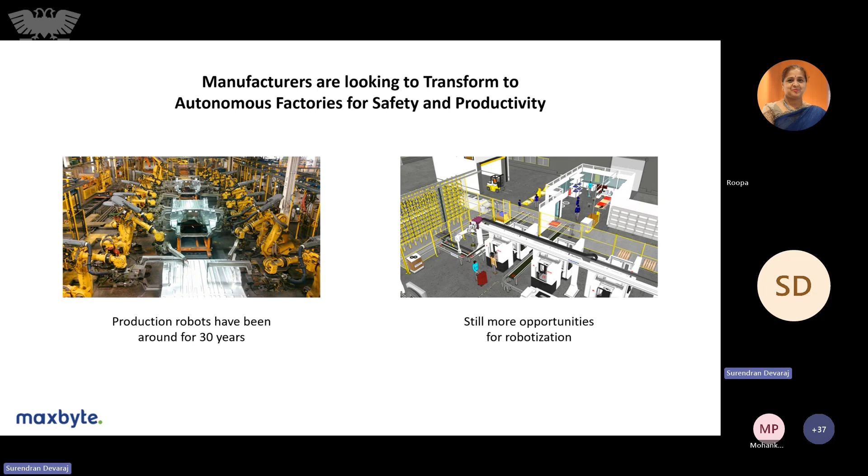So that they can have a complete 360-degree feedback of their shop floor, their production unit, the packaging unit, or the logistics - whatever is required for complete end-to-end production operations on a day-to-day basis. As a company, we are also working on multiple opportunities and areas where this can be strongly integrated with their digital roadmap for any industries.

So manufacturers still see a lot of areas where they can transform their way into autonomous factories. Like digital factory, manufacturers are now keen towards the next wave of technological transformation. They call it a lighthouse factory or dark factory, where they want to run the factory 24/7, even without any human intervention. That is the aim, or the next vision, for all manufacturers with which they want to move their organization or their shop floor.

As the first part of it is the digital, where all our machines connectivity has been made, all our data has been continuously monitored, and insights has been derived from that data. And the next step of that particular digital transformation is how this automation also can be a part of it, like loading and unloading of the machines, like transportation of the goods within the factory and outside the factory, both intra-logistics and inter-logistics.

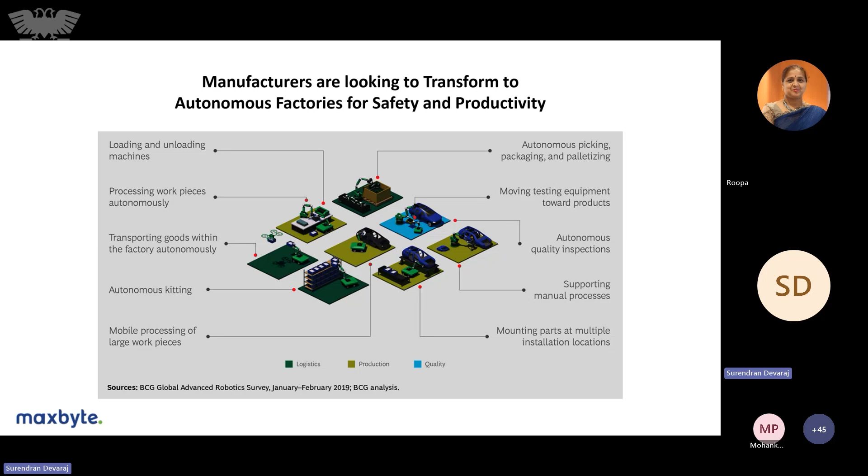And then processing of the work pieces, autonomous picking and packing, in the quality inspection, autonomous quality inspections. So and the installations and so on in the various areas in terms of logistics, production, and quality. So how these automation can be an integral part is something the manufacturers started looking into.

Globally, so similarly, there are a lot of opportunities that has been identified. Either it can be in terms of sorting or pick and place or tugging or warehouse, for other production or material movements also. There are a lot of application areas that has been primarily identified by the manufacturers, so that this AMRs or autonomous mobile robots or autonomous vehicles can be deployed.

So what are the key drivers for this AMR is something also very, very crucial. So based on what we can able to select this particular AMR. So maybe based on the speed, there should not be any latency whenever the material is required on the assembly line or in the production line. It should be readily available without any notification.

There should not be any dependence on manual dependency for the material movements, as well as on the labor dependencies, and also on the modernization, as well as on the cost. How can we able to reduce the cost, as well as the safety is one of the critical aspects that has been brought into picture. So how safely we can able to move the material from one place to another place, how quickly we can able to move it, and how this can be integrated with our day-to-day production scheduling or production activity, these are some of the key drivers for this AMR.

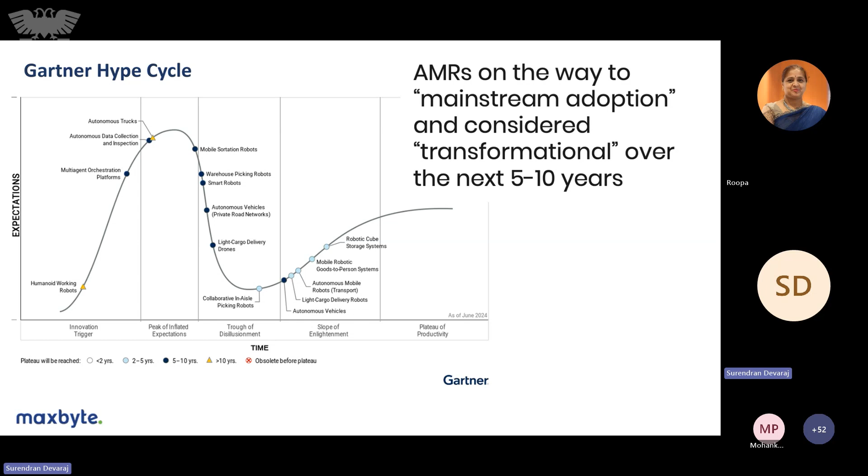And then they can start using, or they can start implementing it in their day-to-day process as well. So this is something which has been released by Gartner over the past few years, and similarly for each and every area - for digital there is a separate hype cycle, for automation, autonomous AMRs there's a separate hype cycle. Similarly for all the technologies, they're releasing this hype cycle where we can find what are the next wave or next gen solutions that can be used in our shop floor, in our manufacturing industry, so that we can completely adapt to this particular technological growth.

So this is like, as I said, the dark factory or the lighthouse factory is like a factory of the future, where we can automate the complete operation of the factory with the help of robots, AMRs, and digital solutions, so that the complete operations will take place autonomously without any manual intervention.

All movements, material movements inside the factories, inspections inside the factories, and data gathering during the assembly or production process will be completely automated and digitized, so that we can take quick decisions on the data we get, and see how these robots, cobots, or AMRs react to particular situations on the shop floor—something manufacturers have started looking into.

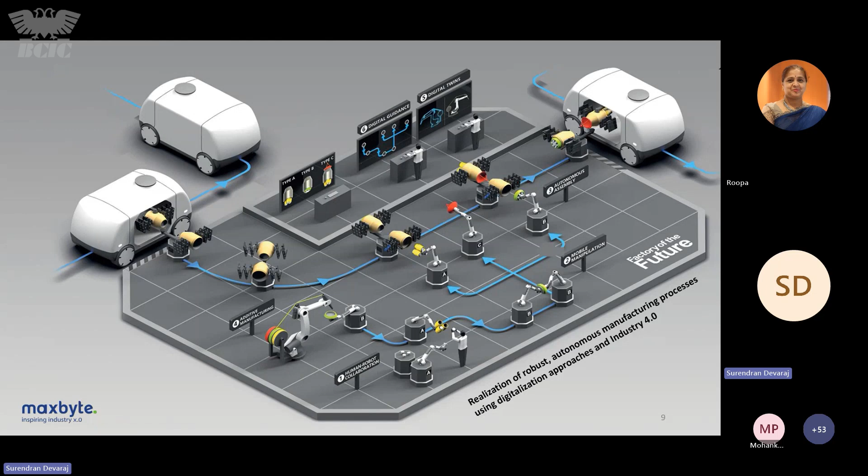This is the future of the factory that we are visualizing—digital maturity autonomous levels. For any digital maturity, there are around 6 levels: computerization, connectivity, visibility, transparency, predictability, and autonomous adaptability. These are the 6 levels we think of in terms of digital maturity.

Similarly, for any factory to transform autonomously, there are again 6 maturity levels: manual, semi-automated, automated, semi-autonomous, autonomous orchestration, and autonomous operations. We can find out which level we are currently in, and what solutions we can deploy to move to the next level and reach the highest maturity for autonomous industries.

There are multiple maturity models available, so we can use whichever suits our particular process and factory.

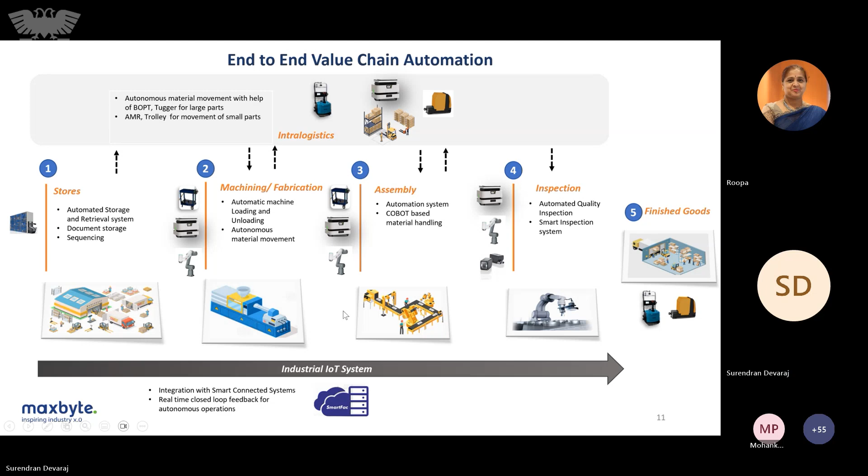There are multiple factors that determine the levels of autonomy for autonomous mobile robots: whether you want only a navigation system to help navigate from one place to another, or material handling where materials can be autonomously moved, and how this can be integrated with other facilities in the system—the ability of machines to communicate with machines without any manual intervention so the complete process can be automated.

These are the various levels we can decide on for our operations, based on what autonomy level we require—whether to go for robot or cobot automation, then AMRs, and then autonomous vehicles for complete automation of the system.

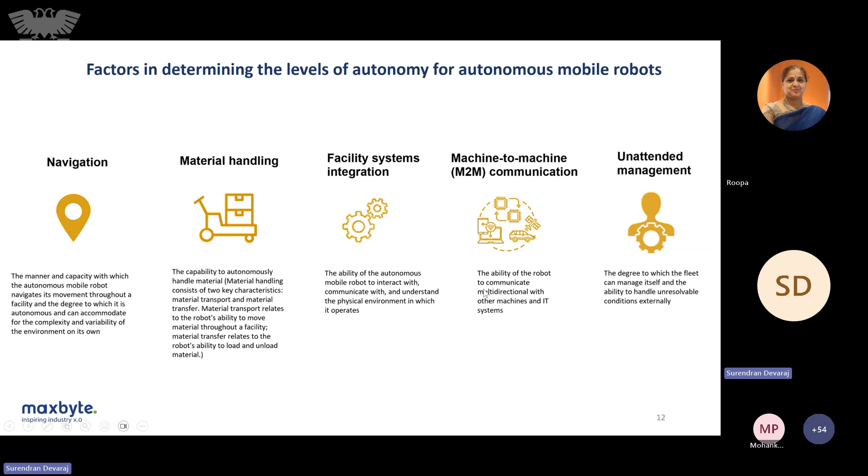To what application we can use, or what kind of automation solution, there are mobile platforms available for industrial application. If we go for a mobile platform, we can go for either navigation type or manipulator type. Manipulator primarily deals with industrial robots and cobots and other areas, so we directly call it industrial mobile robot that can be integrated with our system.

If you go for navigation type, then there comes the AMRs and AGVs. AGV is nothing but an automated guided vehicle, where the vehicle will be moving in the shop floor based on some guidance - either a QR code on the floor or a magnetic strip on the floor. Based on that particular guidance, the vehicle will be moving in a straight line along that particular line itself, which has been laid through the factory. That is called the guided path vehicle or automatic guided vehicle.

The other side is autonomous mobile robots, where there won't be any guidance available for the vehicle to move in. It will be completely based on either lidar or some other autonomous technology mounted on the particular vehicle. It will automatically try to map the complete shop floor, automatically find the shortest route available or the best path available, and then start navigating on its own. That's the key difference between autonomous mobile robots and automated guided vehicles.

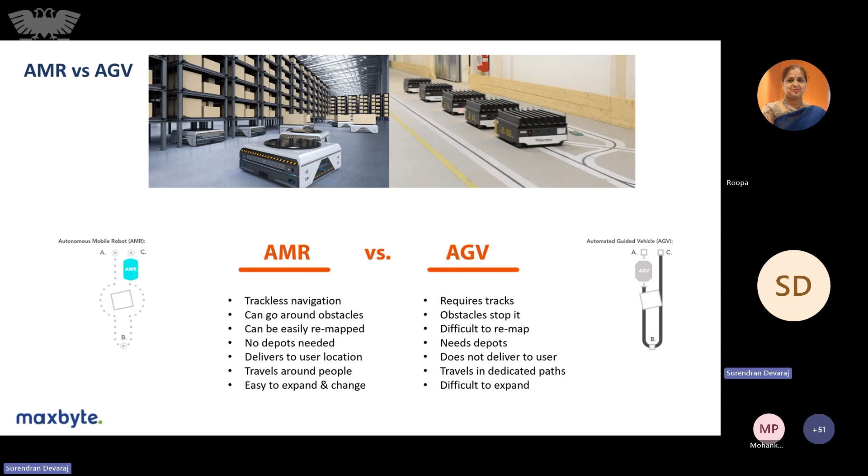Various process areas, like it can be warehouse. AMRs can be configured in warehouse. Maybe the next state can be reconfigured in the assembly area, or the next state can be reconfigured in the packaging area, and it can be used for various purposes as well. So this is the advantage that AMR brings over the conventional AGVs used in industries.

Based upon the form factors, there are multiple forms that AMRs can be available, and also based on the loads being carried, the AMRs can be in different forms. For example, the truck is one form of AMR where it can pull the load. It is kind of for heavy load, like more than 1 ton or 2 ton.

If there's a load, we go for this truck. Or if it is like 50 kg to 600-700 kgs of weight, then we can go for a mouse type AMR where we have a platform that can lift the material or tug that material. So forklift is another kind of AMR where it can be used to lift loads and relocate loads from one place to another.

So based upon the application, based upon the loads, and also based upon the driveway capacity and usage, the AMRs can be in different forms. And the existing vehicles also can be converted to AMRs. For example, our existing BOPTs, battery operated pallet truck vehicles, can be converted into an AMR.

Legacy cleaning machines can be converted to AMR so that it can operate without any manual intervention. Likewise, any vehicles can be converted into autonomous vehicles, and AMR as a separate platform is also available. So as I said, there are two variations to these AMRs.

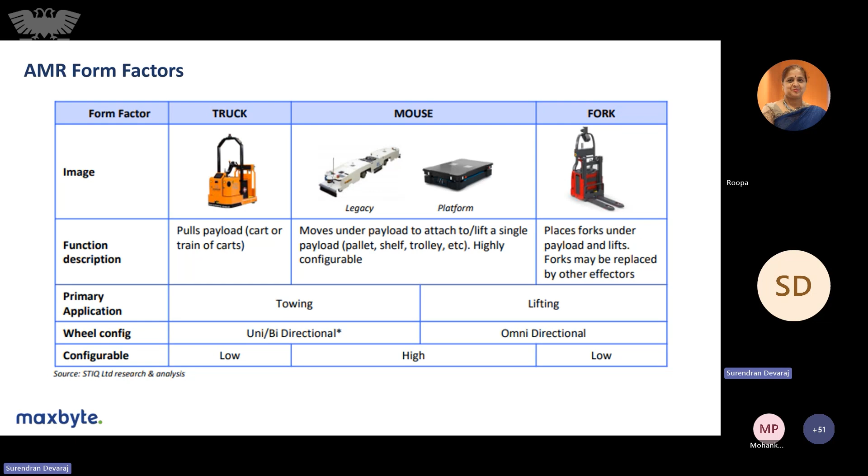Either it can be a platform-based approach where if you see a picture, there will be a base platform, and on top of it can be used for multiple applications. Whereas the other is where vehicles can be converted to AMRs like forklift, stackers, tuggers, or BOPTs, and that can be used to pull the loads or move the loads from one place to another. So these are the primary variations or primary applications of this AMR.

And these are again some examples, like in healthcare, how it is helping the people, or how it helps in the movement of goods - not only material, even administrative materials like office files or patient history files or meals, clothes. So that can be used for the movement of these particular items, any kind of movement that can be automated or made autonomous using this AMR.

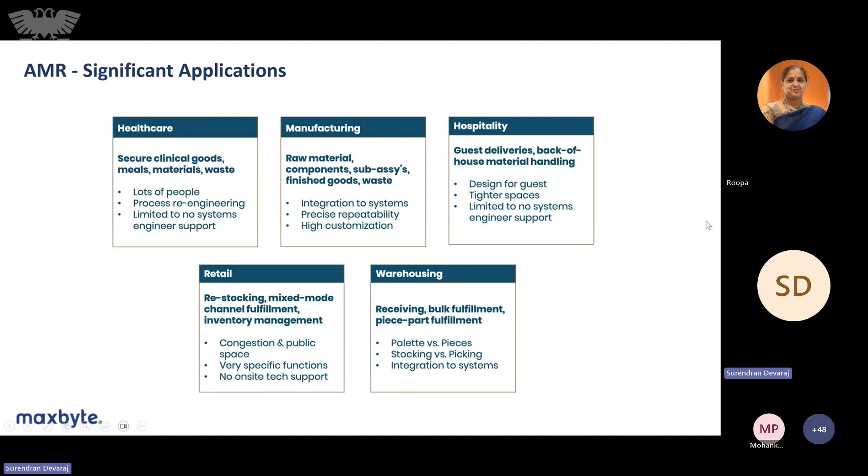In manufacturing, primarily used for raw material movement or finished goods movement or quality inspection. In hospitality, where it can serve the guests, or guide them as well, in retail as well as in warehousing. So these are the multiple significant applications where the AMR is now finding its space.

So these are the major components and features of an AMR. There can be multiple things on the vehicle - it can be either a lidar-based navigation system, and there can be a significant safety control system embedded in the vehicle, and the load carrying mechanism and drive mechanism can be completely customized for the movement. We can call this the intelligent controller of the AMR, which can be embedded there. There can be cameras kept so as to identify obstacles, any depths or potholes on the way, and the safety sensors.

So that can be easily fitted so that all the 360-degree obstacle detections can easily be customized or easily configured in any particular vehicle.

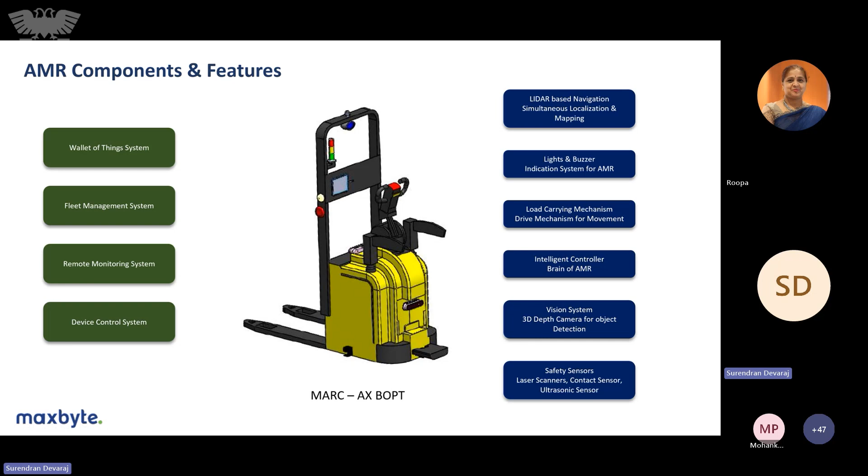So these are the key technological concepts, and the major things like internet of things, fleet management system where multiple AMRs can be controlled in one single application. The remote monitoring of this system is available, battery management system is also there, and device control system where we can control the complete operations of these AMRs is now available. So these are the primary components and features of any AMR that can be configured or built from scratch.

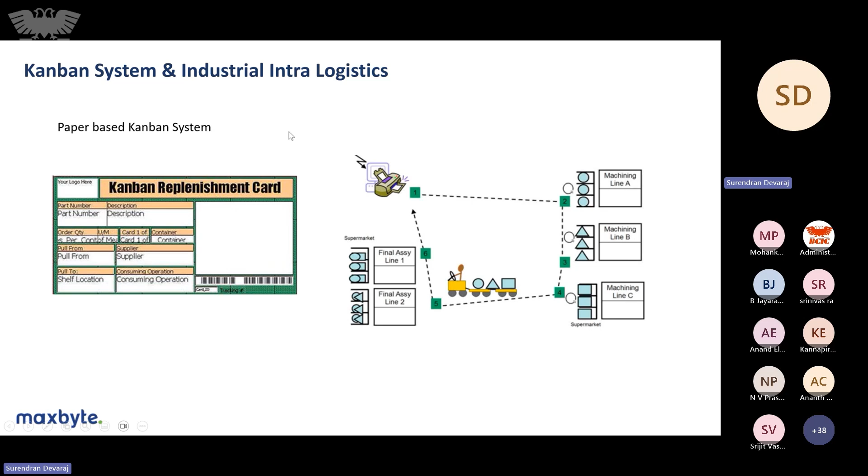So how AMRs are used in one significant application is on the Kanban, where it can be used for industrial intralogistics. Materials continuously move between one machining area and then go to the assembly area. Earlier they were using a paper-based Kanban system, which had high manpower cost, delayed data, loss of wrongly processed cards, insufficient inventory sizing, and longer lead times as some basic disadvantages.

So now industries are shifting towards e-Kanban, where they have real-time visibility of products and can manage inventory in a more optimized way, with much shorter lead times. So AMRs are now becoming an integral part of this, and AMR and IoT-based Kanban systems are now being adopted by all industries.

The movement of trolleys or materials from one station to another is completely autonomous. Based on the cycle time, once the machines are connected to a particular operation, we can have live data on the performance of those machines. Once the product or machining operation is completed, a signal is automatically given to the AMR, which goes and picks up the material and delivers it to the next station.

So the complete material movement in any particular cell or bay can easily be automated and digitized, so that no manual intervention is required.

Whenever something has to be notified to the users, the system is able to notify them either by email or SMS alerts. Whenever the vehicle is not moving or production is not happening, email and SMS alerts will be sent to the users.

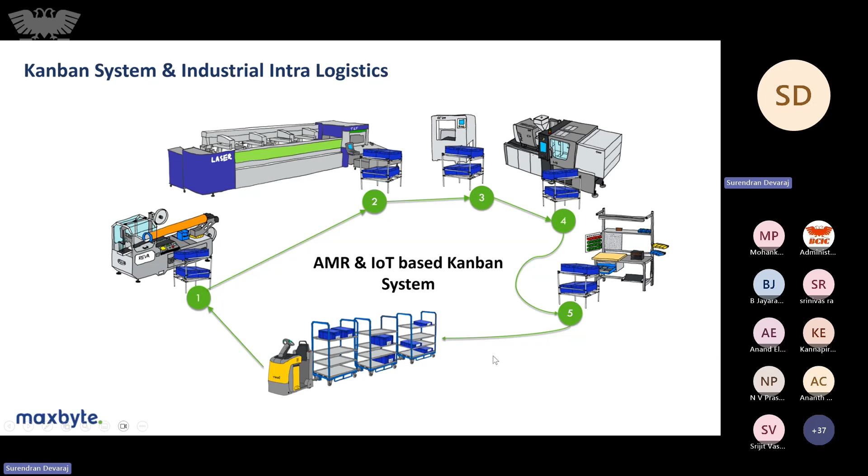AMRs have significant industrial applications as well. One such application is material movement in the machine shop, where machine-to-machine component movement can easily be automated with the help of AMRs, either in the form of a pallet or with the help of a cobot-based material picking and movement system, where a cobot or robot picks up material from the machine and places it on the AMR, which then starts moving it.

Or it can be placed on a pallet, and the pallet will either be lifted or tugged over to the next machine. So this will mostly be fixed path movements from one machine to another.

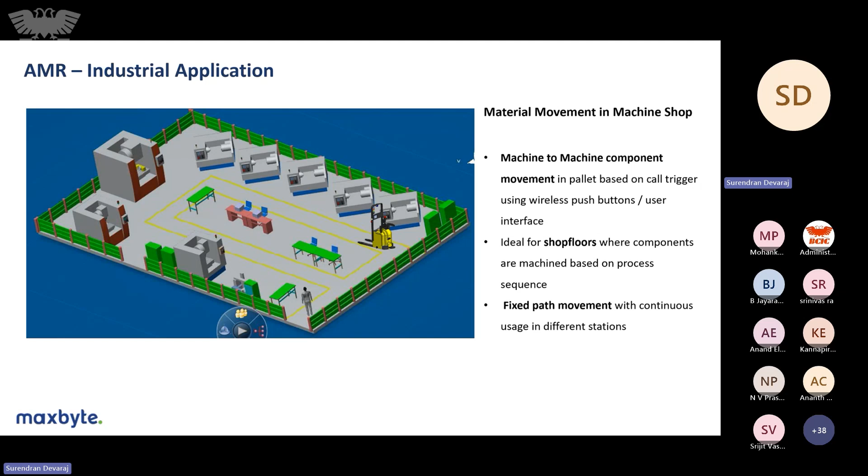Similarly, in assembly lines, the movement of semi-finished components within the assembly line, or from the assembly line to the testing area or finished goods area, can also be automated through continuous movements of materials from one area to another.

Whether from a subcell, with multiple sub-assemblies feeding the main assembly lines — once the sub-assembly line operation is completed, the material from the sub-assembly to the main assembly can easily be transferred with the help of this AMR.

So it can either be a fixed path or an on-the-go path direction, depending upon the assembly operation or assembly process.

And again, from the finished goods for the other material movements across various departments, whether it can be from the warehouse to the production area, from production to assembly, assembly to quality inspection, from quality inspection to the packing area, from packing to the dispatch area.

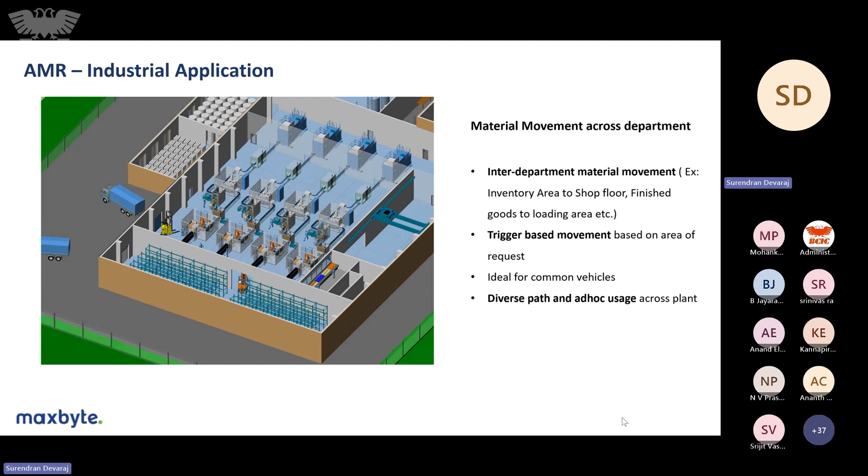So wherever there is huge material movement involved, all these movements can easily be automated with the help of autonomous mobile robots, or autonomous vehicles, that are already available inside the factory. So what are the key benefits of AMRs? One of the primary reasons everybody is thinking to adapt to AMR is mainly overall efficiency and speed.

Material handling can account for 30 to 75% of production cost and increase operational cost by 15 to 30%. This is one of the key untapped areas that every industry is now looking into, how it can be automated or optimized to help with cost reduction.

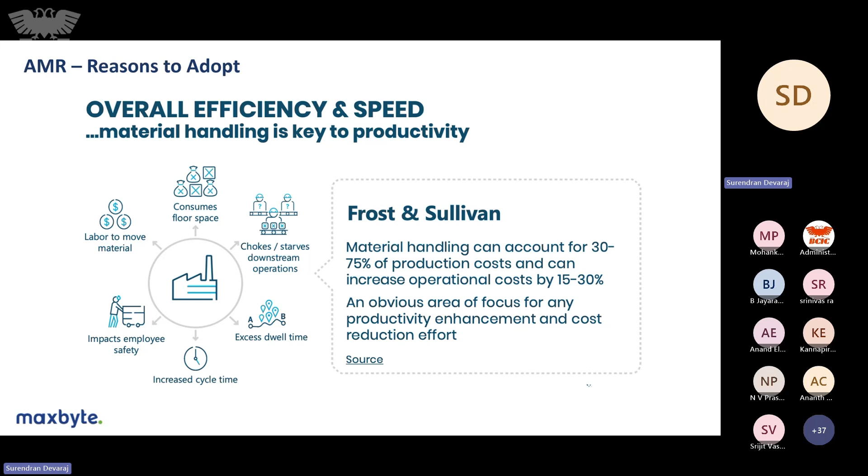It removes at least 15% of operational cost. One of the major areas is safety. Where dealing with heavy material, or with unsafe materials, wherever that kind of situation is there, AMRs can come in handy.

It is flexible, can be easily configured across multiple areas, stations, or departments. It is dependable, easy to install, and it is also scalable, built for the future, so it can be scaled to other areas as well.

This is like a normal conventional system. When you think of automation for material movements, there are multiple methods or concepts available: conveyors or machine operators, AGVs, and AMRs. This slide shows the key differences, advantages, and disadvantages between these concepts.

The primary advantage of this one is there are no operators, no physical barriers, and maximum routing flexibility is available. This means it can be used even for intrinsic automation or very process-driven areas. It can be easily automated.

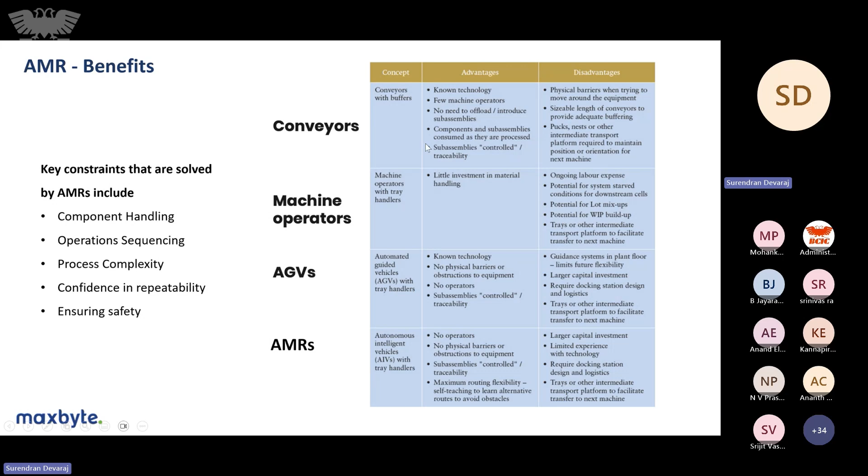So how to get started with an AMR? Know your requirements, collect information about the environment and use cases. Do a quick analysis of how it will save time, and avoid perpetual pilot mode on the development side, since not all these things can be automated.

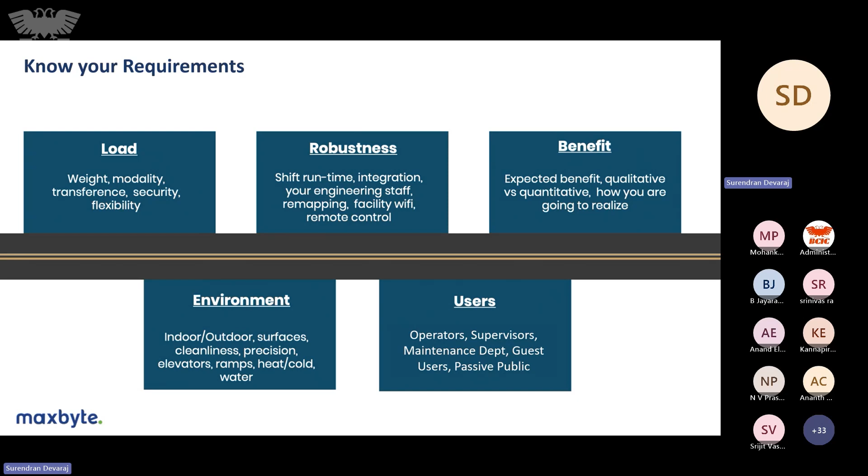Start small and then go for bigger automation. Don't immediately start with complete end-to-end material movement automation; maybe go for a department-wise or module-wise based automation, then a complete set. Based upon the load, environment, users, and the benefit we are getting, we can select our AMRs and particular autonomous vehicles for our operations.

With this, I will quickly show a couple of areas where we have deployed this AMR. So maybe a couple of videos that will help us understand the different AMR usage.

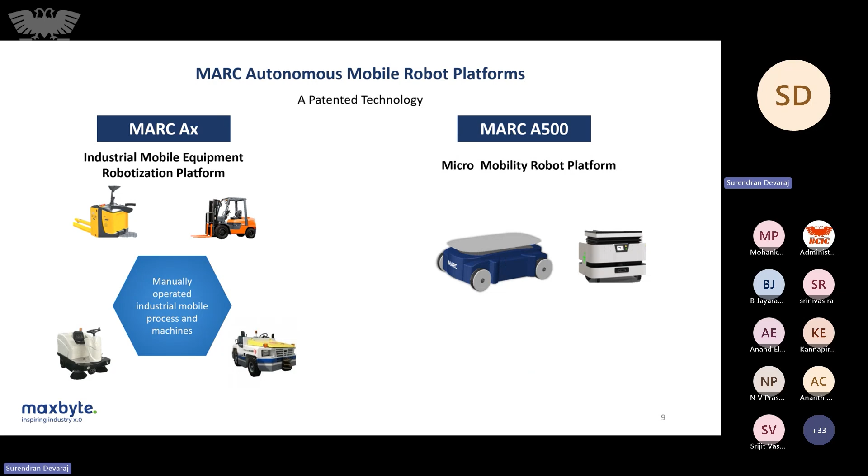As I said, there are two areas. One is the autonomous vehicles, where any industrial vehicle can be converted to an autonomous vehicle. The next one is the platform-based approach, where a base platform is available and can be used for multiple applications. So again, it comes with industrial IoT, AI and ML-based systems, robust navigation system, battery management system, fleet management system, and various sensors and controls for safety.

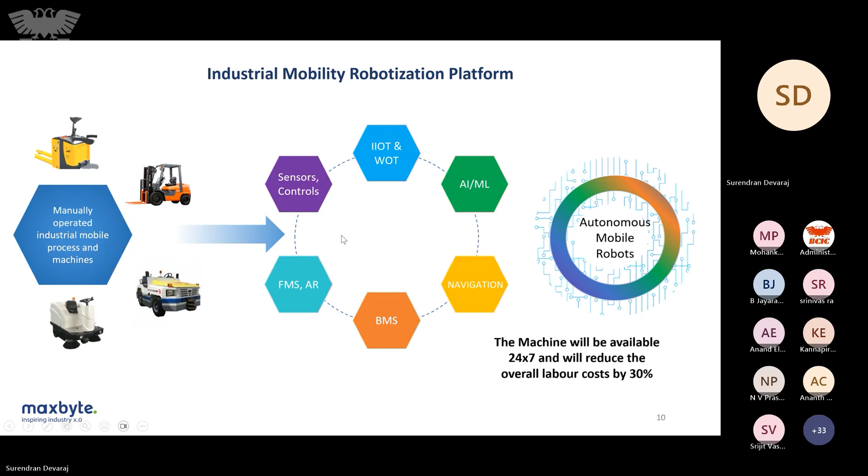This is kind of a platform-based approach where we have a load capacity of up to 500 kg, and then we can have a running time of up to 8 hours and maximum speed of up to 2 meters per second. This is the recommended speed for any AMRs, maximum 2 meters per second, based upon the ISO and ANSI standards, complying with all international safety standards.

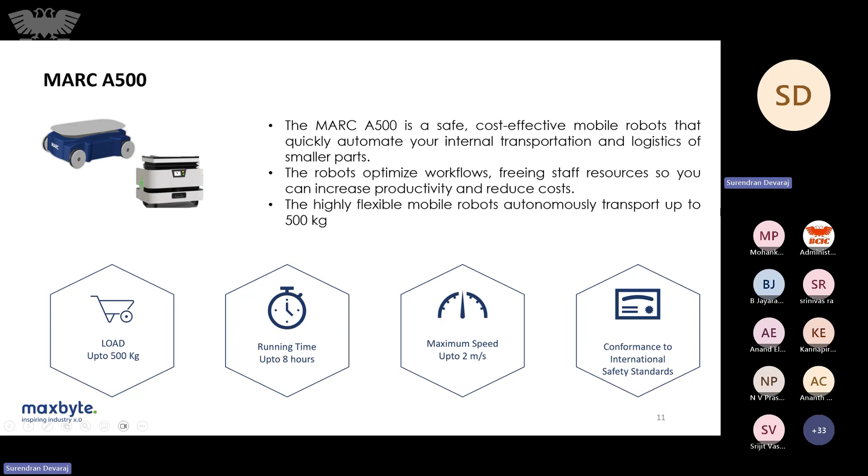So based upon the application, it can be used as a tugger, it can be used as a lifter, it can be used as a roll conveyor, or it can be used for other healthcare applications also.

So this is a primary architecture, how AMRs can be configured. There can be multiple AMRs inside the factories, and we can connect all these AMRs into one single system, and we can control those particular AMRs as well. This is how the AMRs can be configured with the help of ROS node systems and also the fleet management system.

They have separate ROS processors for each and every AMR, so how that can be combined together into one single system can also be configured. This is a basic architecture, we can say, for configuring our AMRs.

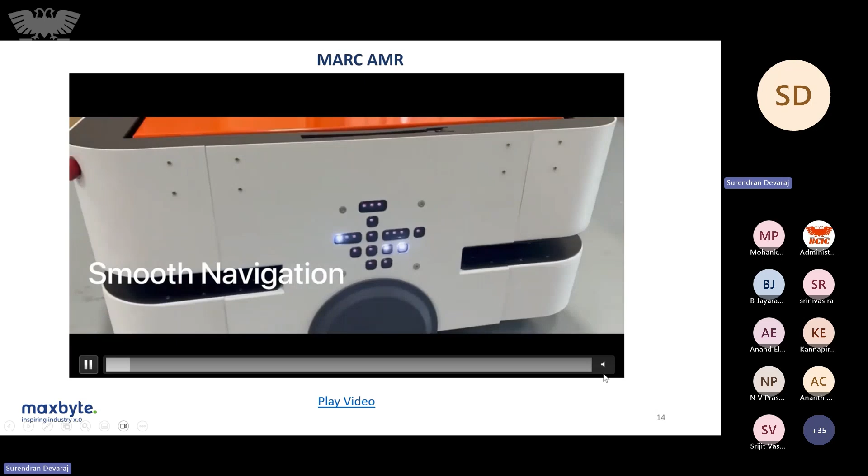This is one such example of an AMR, where it is able to lift a small vehicle, for a small capacity of up to 320 pounds, or we can say 350 pounds.

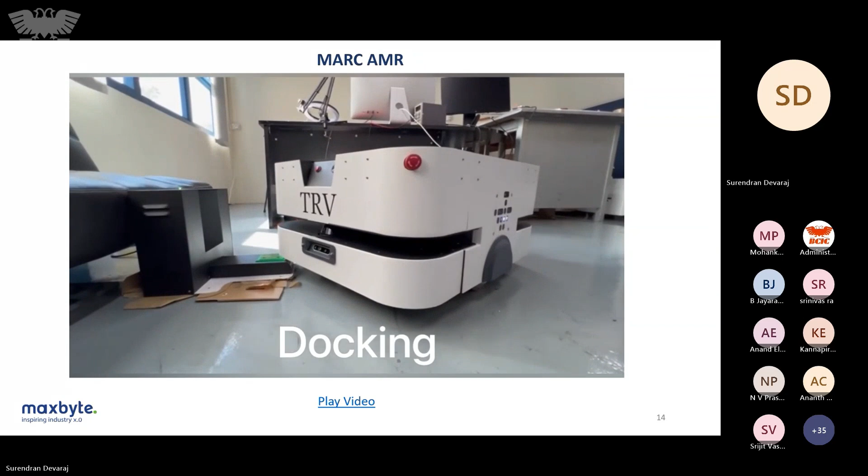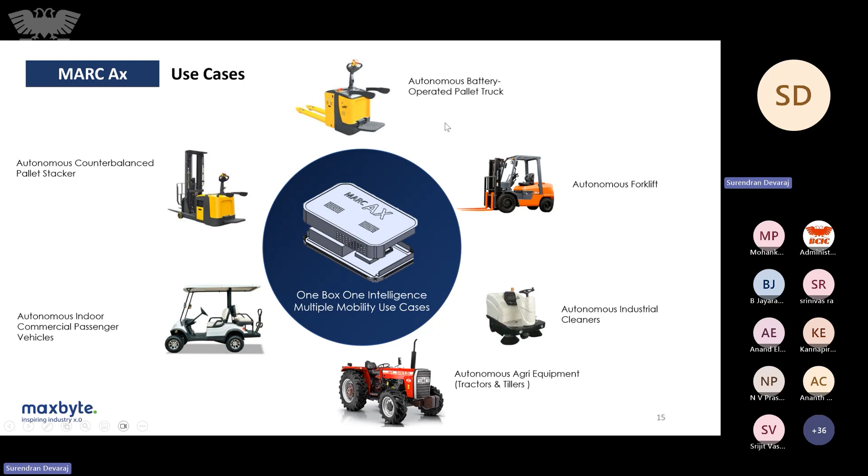So this is one such application of one of the AMRs. As I said, there are multiple use cases where an industrial vehicle can be converted to an autonomous vehicle, and one such example is this BOPT. How this BOPT can be totally converted to an autonomous vehicle is something we have done for some of our customers, so maybe this video will show you an example of that.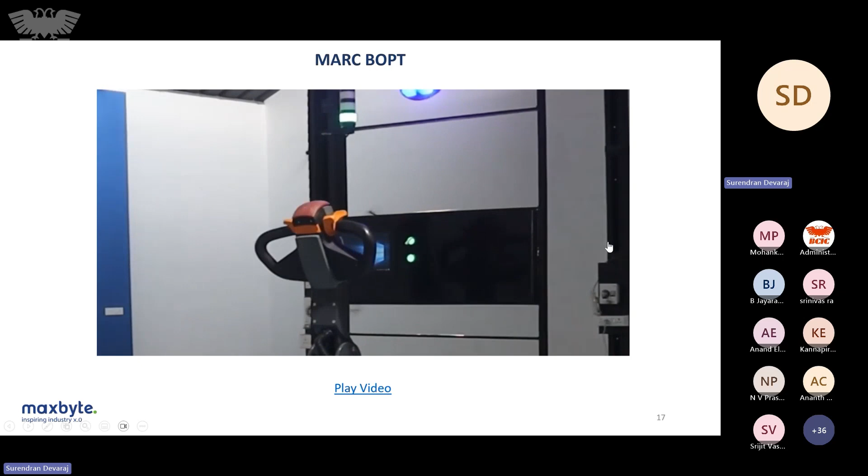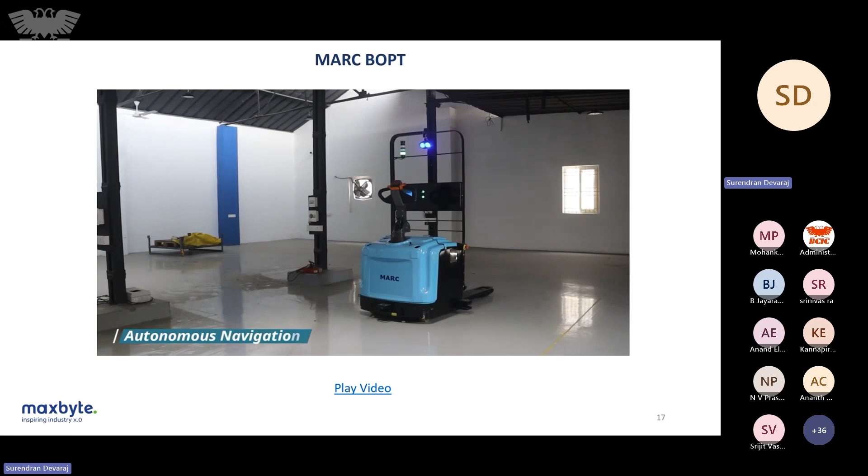So this BOPT was obtained from Godrej, it's about 2-ton capacity. This vehicle has been converted to an autonomous vehicle. It comes with an HMI as well, where users can configure the start location and end location, between which station it can be moved. Based on that particular location or selection, the autonomous vehicle will be moving.

So all the operations, the lifting operation, the placing operation, everything is automated here, or made autonomous in this particular vehicle.

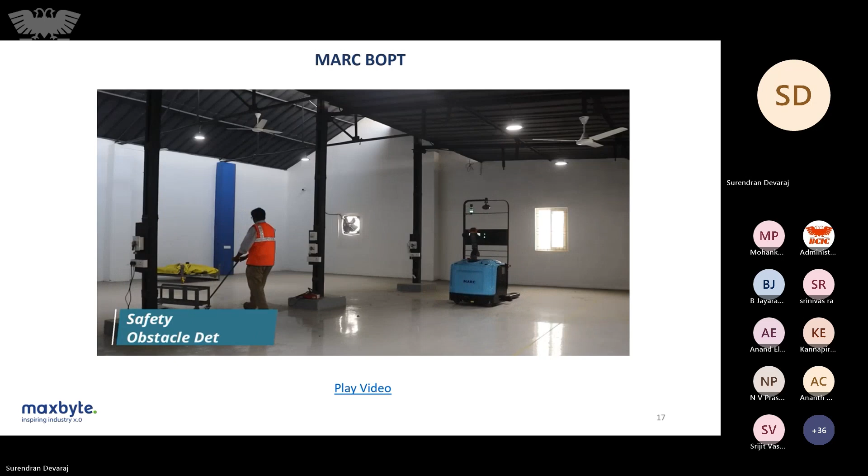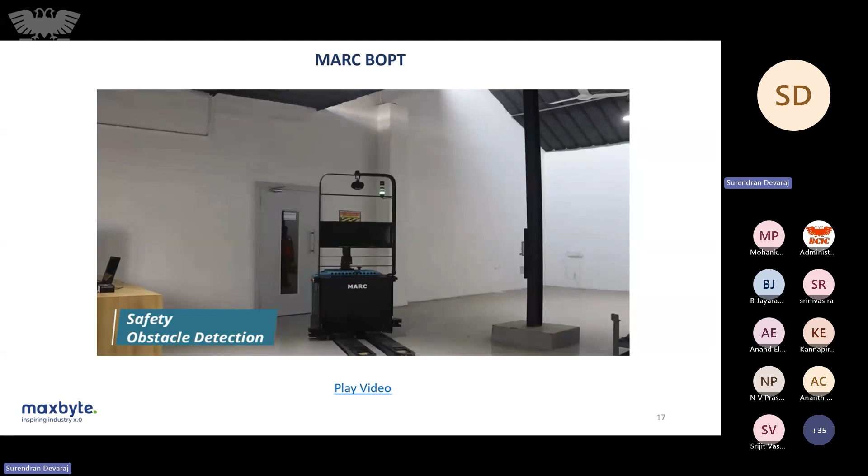And as I said, all the 360-degree safety detection or safety mechanism can be built into this particular vehicle. The speed can also be controlled. Based upon the environment, we can either control or configure the speed from 0.5 to 2 meters per second.

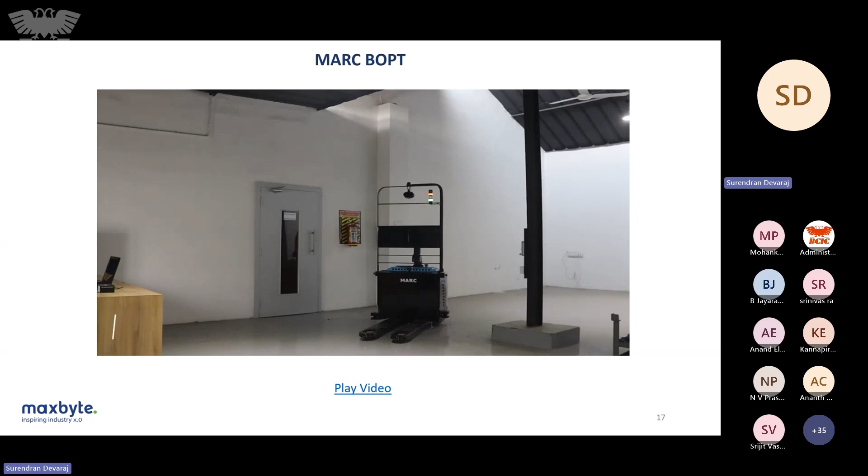The emergency stop button means the vehicle can be stopped at any moment of time, and it can be moved to a safer place also.

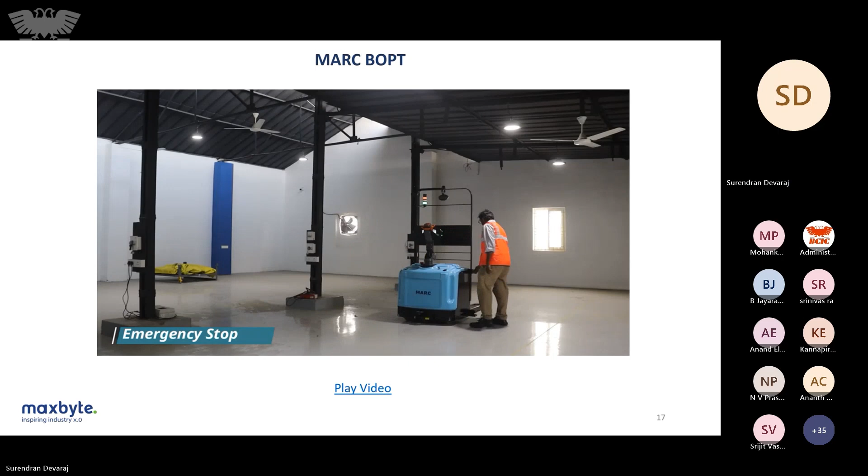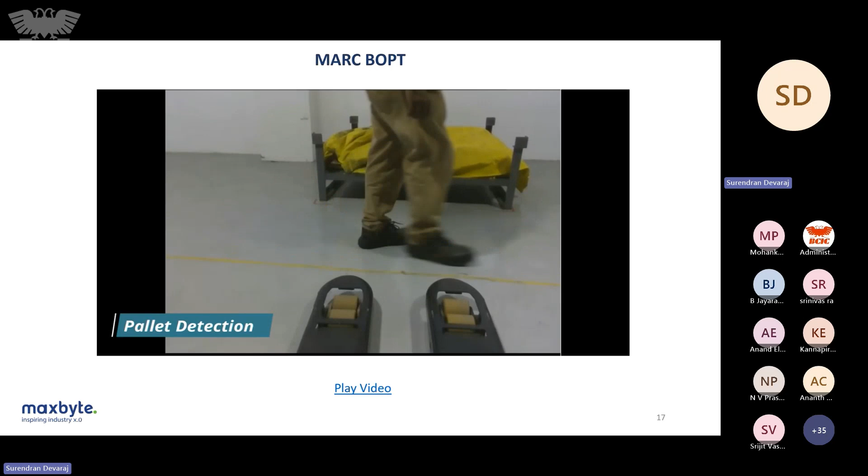It also has reverse motion safety sensors, so it identifies people or obstacles at the reverse side, and it is able to identify the pallet with the help of a QR code. It can identify it and use it for identification as well as alignment. It will align with the center of the particular pallet, and the pallet will be lifted and delivered to the required station.

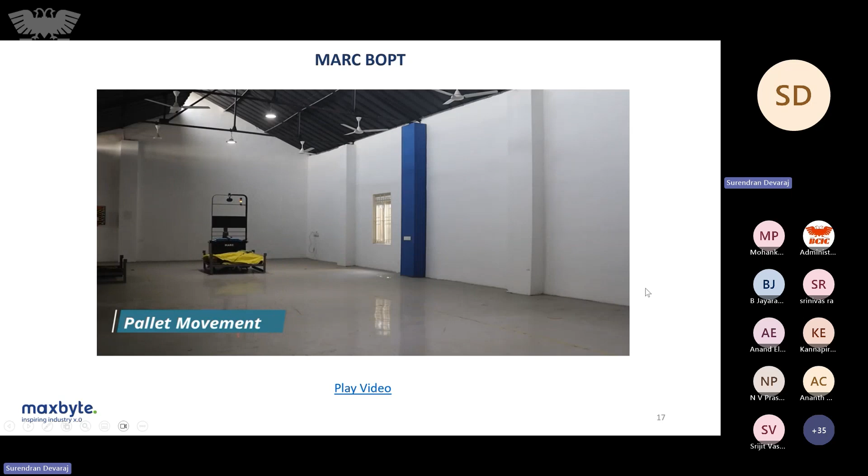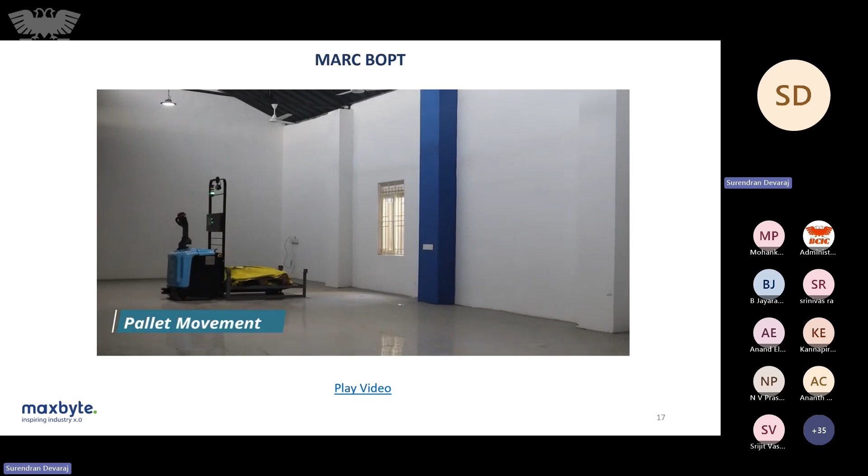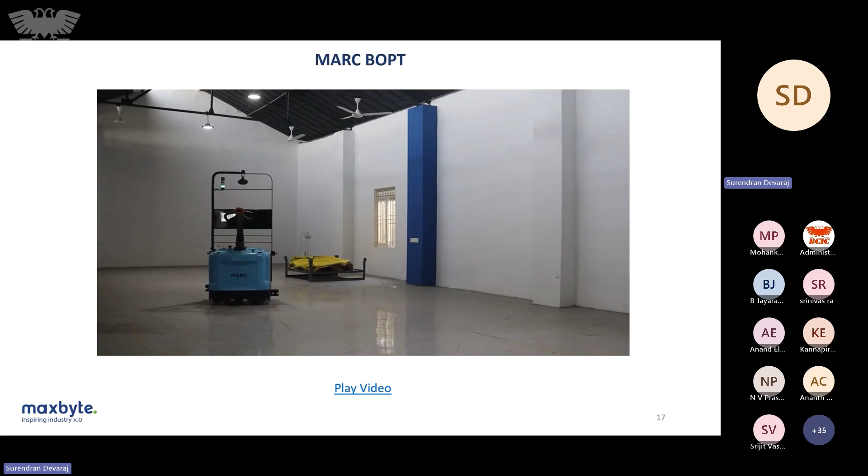So this is one such example of how an existing vehicle can be converted into an AMR. It can be configured in two ways. Based upon our production scheduling, this vehicle can automatically come to a particular station based upon the particular machine's runtime and the part finishing time, or else each station or each line will be equipped with a push button. Whenever the operator wants this vehicle, they can just push the button and it will come autonomously to that particular station. So there are multiple ways these AMRs can be configured for material movement.

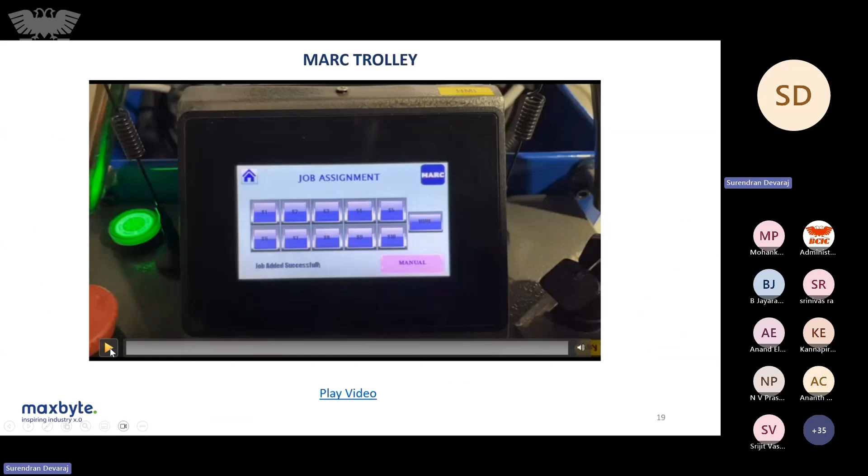And that is for a bigger vehicle, a bigger load. If the loads are very small, we can also use these trolleys as autonomous vehicles, where we can configure multiple stations, and these trolleys can be used to move materials weighing from 5 kg to 150 kgs.

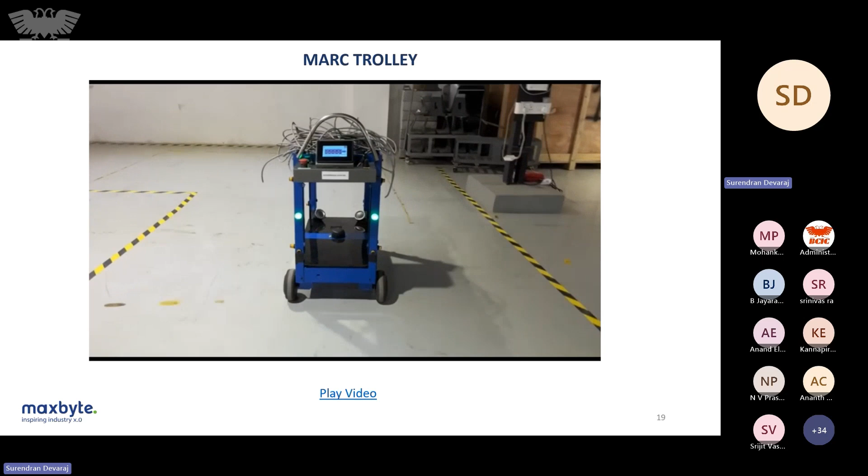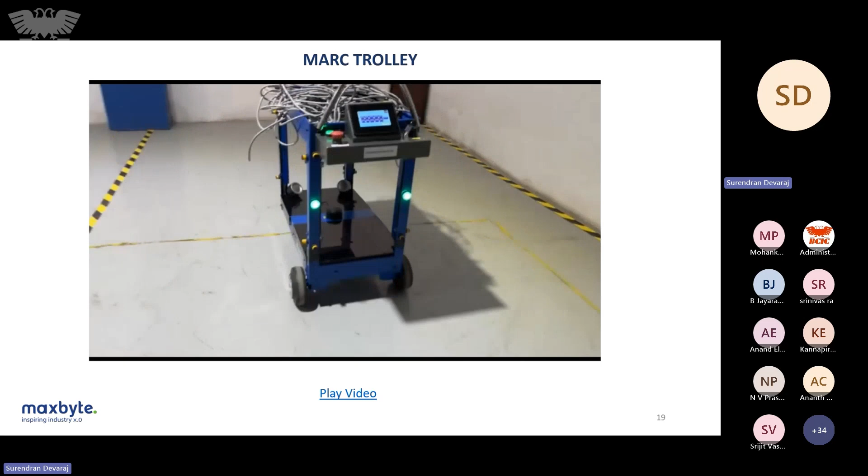This will be helpful majorly where tool movement is needed as well. So from the tool room, various tools can be given to the machining area autonomously, and also where inspections have to be done in the operation on the shop floor area. People will go and pick up the particular sample material, and every time they will be moving between the stations, the inspection area, and the assembly area. So those kinds of movements and processes can easily be automated with the help of these AMRs.

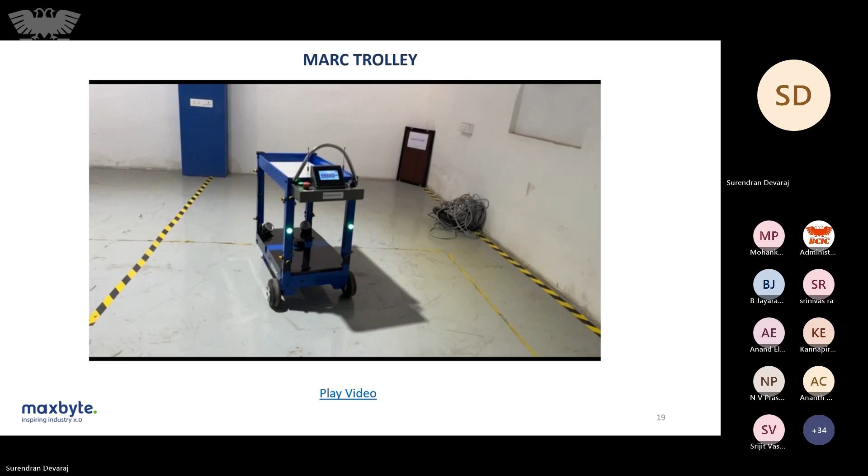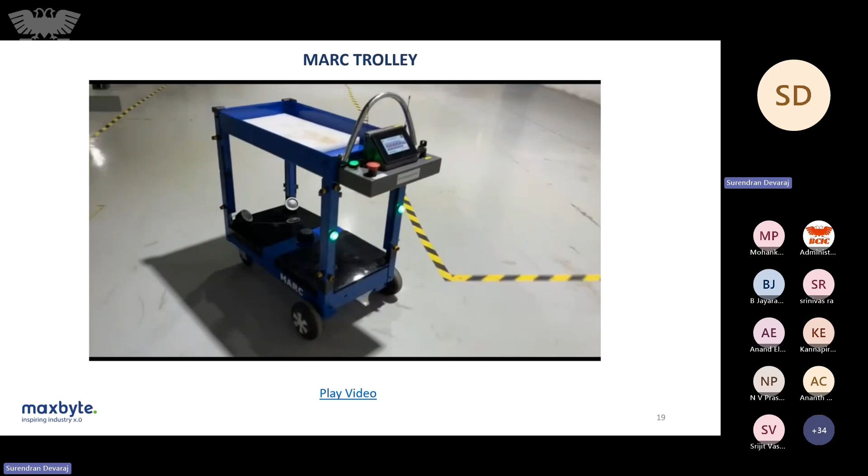This is completely configurable by the users, so they can just take the vehicle, configure it for their shop floor, and identify the stations where it has to stop in between. So everything can easily be done by the users, and then they can start using this vehicle. It might take a maximum of 2 to 3 hours for configuration, and then they can start using this vehicle for their day-to-day operations.

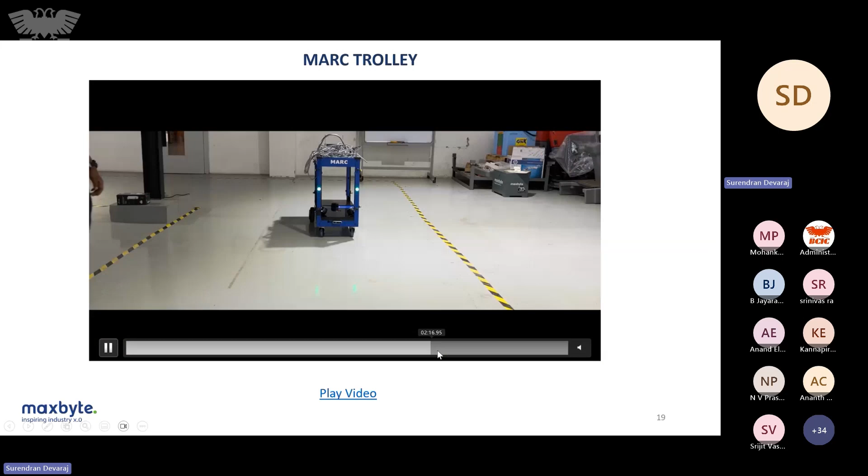Here also, all the required safety aspects have been built in. The vehicle can either stop on obstacle detection or it can take an alternate path based upon the requirement, and we can configure it accordingly as well.

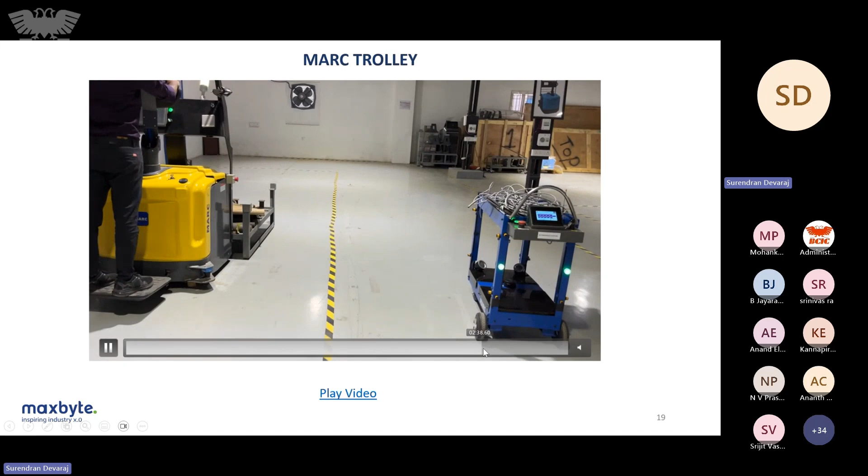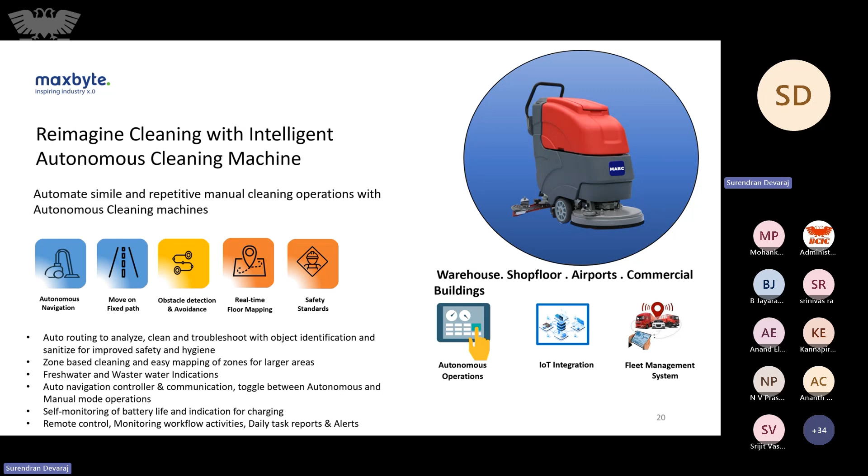So this is another application. One more application we saw is in the cleaning area, on the facilities side, where we have cleaning machines like this. So how can that be converted into autonomous vehicles? This is one such example of converting a walk-behind cleaning machine into an autonomous vehicle. Just define the zones where it has to be cleaned, and based on that, the vehicle will automatically go and clean that particular zone, and it will come back to the home position.

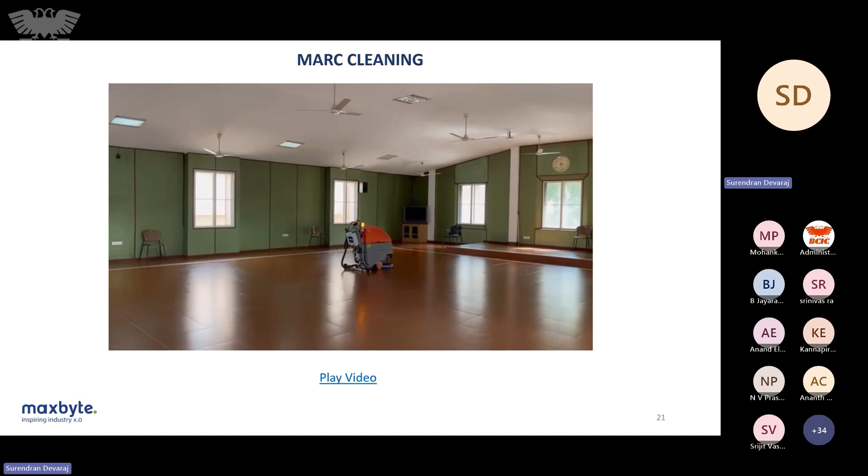Again, it has all the intelligence embedded in it - the fresh water level, dirty water level, battery level, everything can be monitored, and all the required notification alerts will be sent to the respective teams based upon the configurations. We can also analyze the cleaning performance - what is the performance of the cleaning that has been done - and that will be available as a report for the users to take from this particular machine.

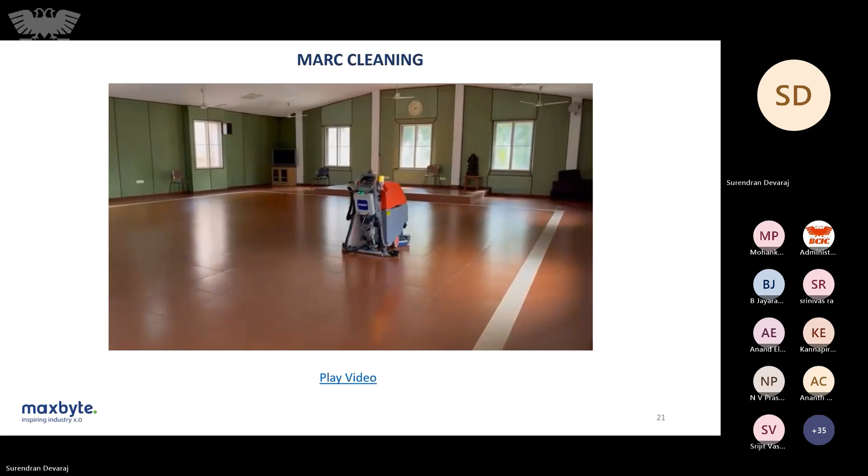At the end of the zone completion, we do a final round at the borders so that if any areas have been missed, they can easily be cleaned here. So again, this is one such example of this particular AMR.

So this is not an AMR, but again, it's another application that can be seen here - how an existing trolley can be converted into a motorized trolley, so that users can easily use it for navigation purposes. This is one use case that has been done for a bigger e-commerce company.

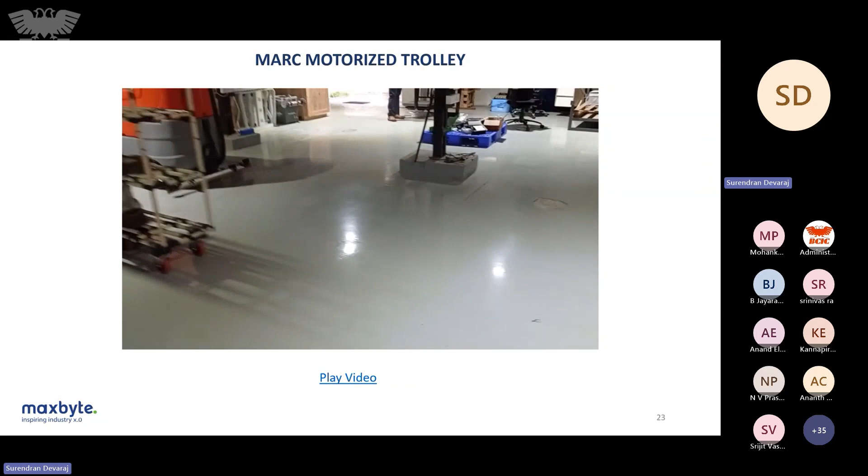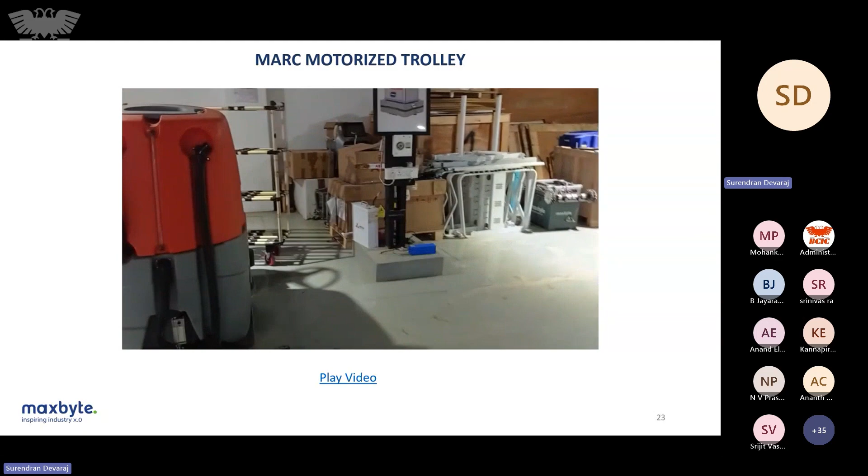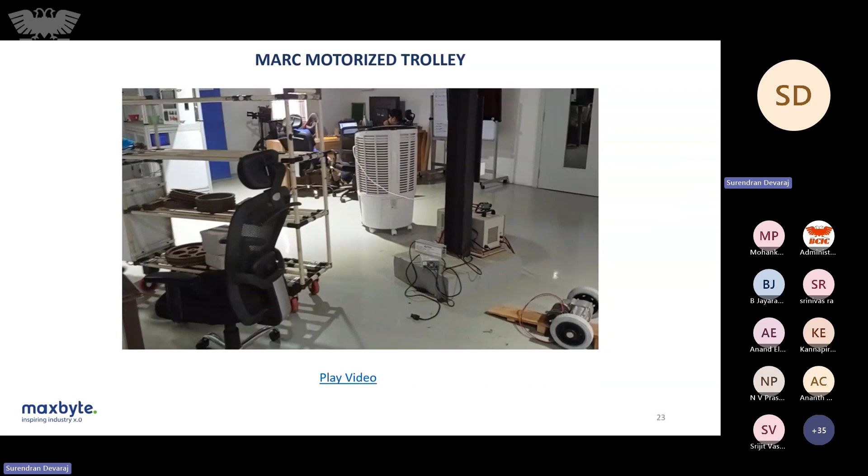The woman workers wanted to move this trolley, which is pretty much heavy - they can carry up to 400 kgs - so they were finding it difficult to push or pull it. So they converted that into a motorized trolley. Just like operating a vehicle, these trolleys can be operated. But again, this requires manual intervention here, just for pulling and this thing. This is another example of a small automation here.

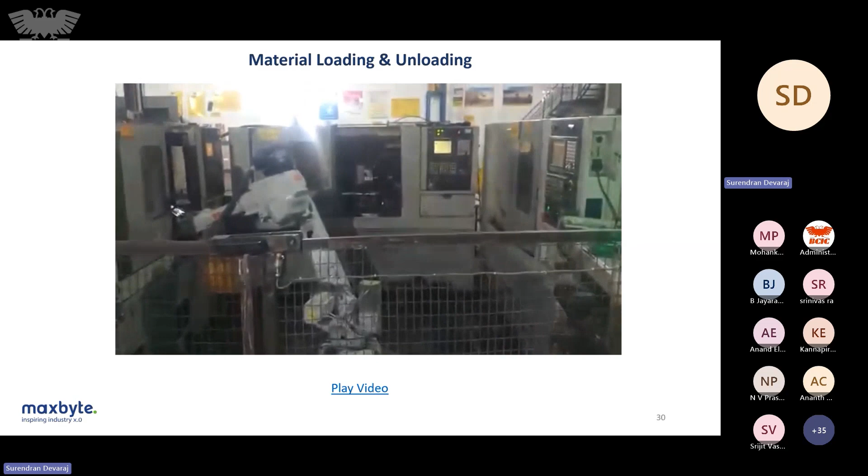This is one such example of station automation, or we can say line automation, where cobots have been deployed to automatically pick and place material from one machine to another. This is a complete process, fully automated - there is no manual intervention required here.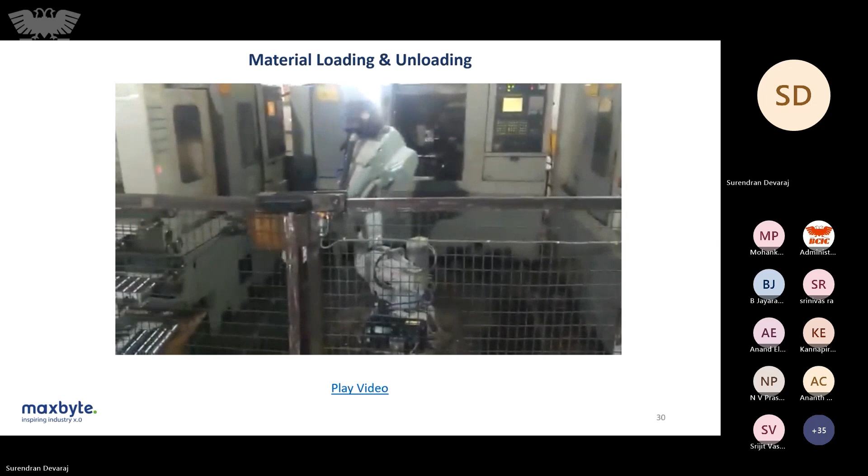Once the machining is completed, the machine will communicate to this particular cobot. The cobot will again go and pick up that particular material, place it in the next machine, and once all the operations are completed, it will place it in the finished goods area.

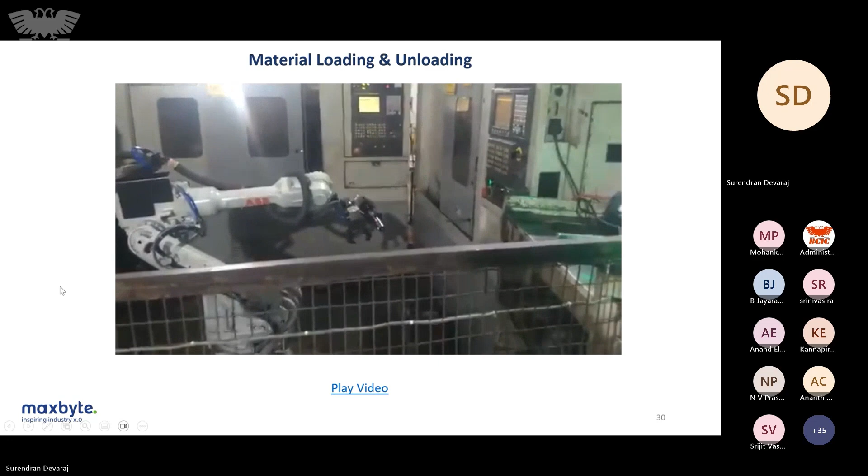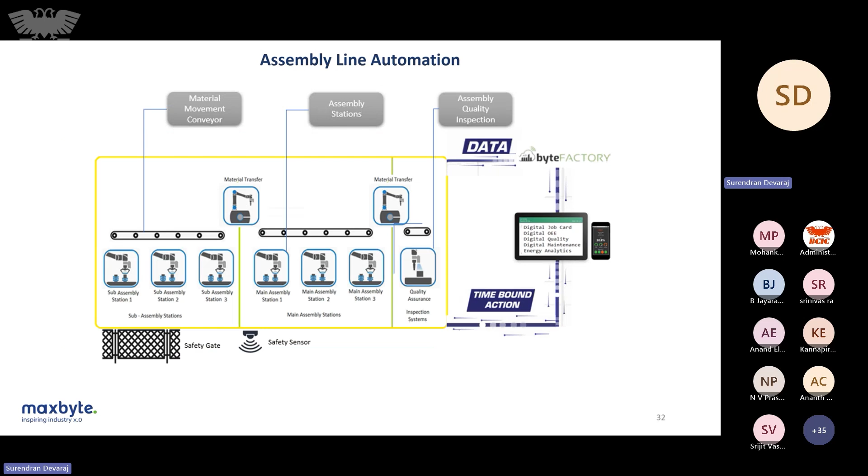Similarly, robots and cobots can be used for assembly lines and assembly stations. Multiple automation systems can be easily deployed across the process lines here.

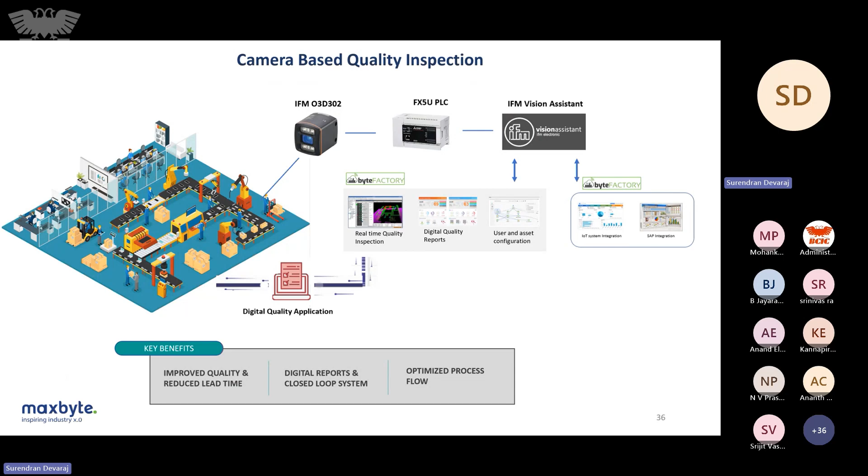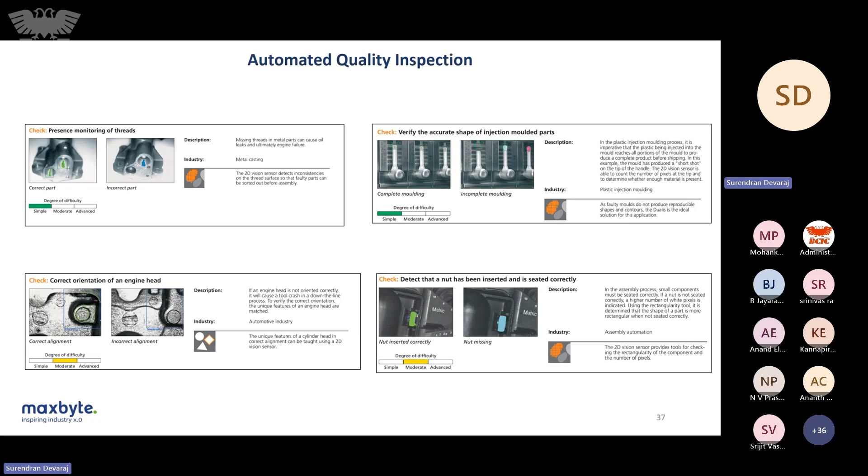Camera-based quality inspection is one of the biggest areas having a huge impact. How can this quality inspection process be automated - presence of any object, orientation of any object, or other quality checks - how can it easily be automated, and what are some of the areas where quality-based inspection is being taken up.

The storage automation system, the AS/RS system, has become an integral part of this automation solution portfolio. The warehouse automation system can be completely automated and easily integrated with our existing SAP or ERP systems for continuous production lines.

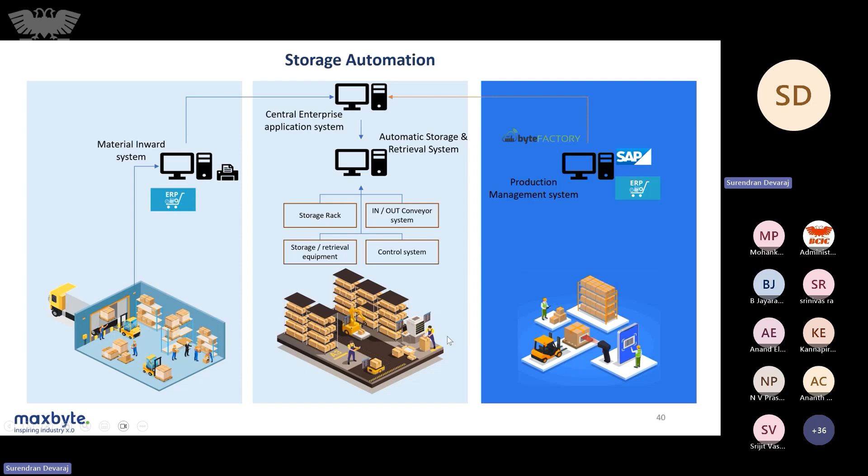Even drones are now finding a huge space in this area, used for automated inventory management. Every 60 minutes, a drone will automatically go and take the stocks, and the data will be automatically transferred to a system rather than a person keep checking the stocks. So these processes can easily be automated with the help of drones as well.

Based upon the application, based upon the usage, and also one of the primary criteria - the budget - we can select what kind of automation system we want to start with, and then slowly move ahead with our autonomous factory implementation.